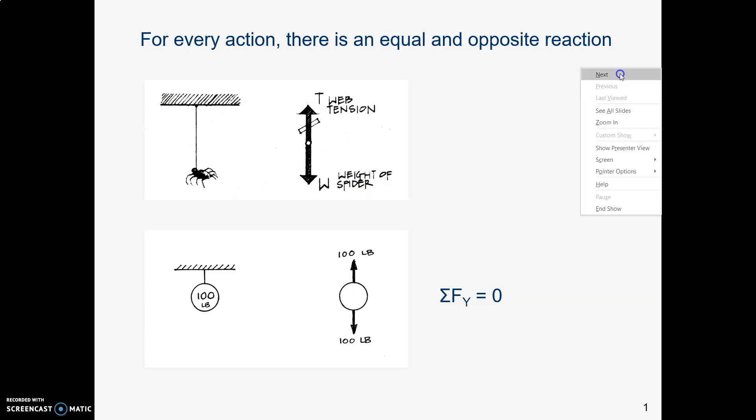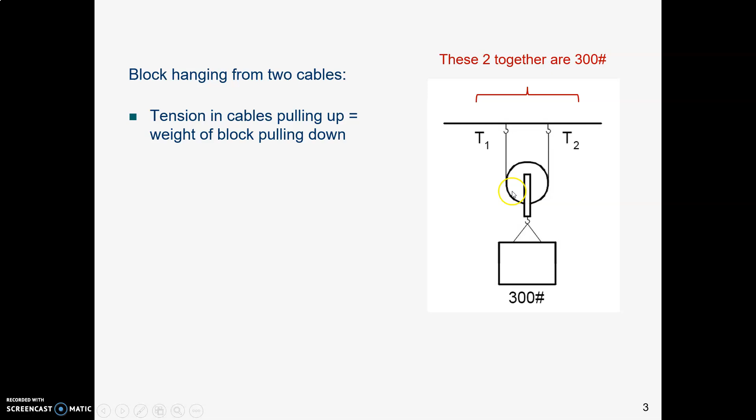Now, how about a block here? This thing weighs 300 pounds, and it's hanging from a pulley, and it's got the cable going around both sides of the pulley and connected to the ceiling. All right, so what do you think is happening in those cables? Think about what you know about this equilibrium equation, that the sum of all forces in the y direction, in this case, the sum of all forces equals 0.

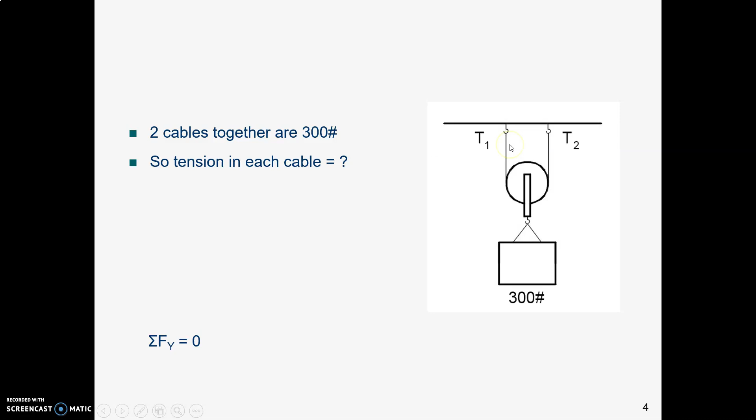And what have you got? You've got 300 pounds going down, so you must have 300 pounds going up. But that 300 pounds going up is divided among those two cables. So how much is in each one of those, T1 or T2? If you thought each one has 150 pounds, you were right.

Now, what if this is you lifting this 300-pound block, and you wisely figure out, it would be easier to lift if you could pull down on that cable. So you do this. Things are starting to look more complicated, but what you might notice is that there are still two cables going around this movable pulley. There's still 300 going down. There must be 300 going up, regardless of what this person is doing with the changing direction thing.

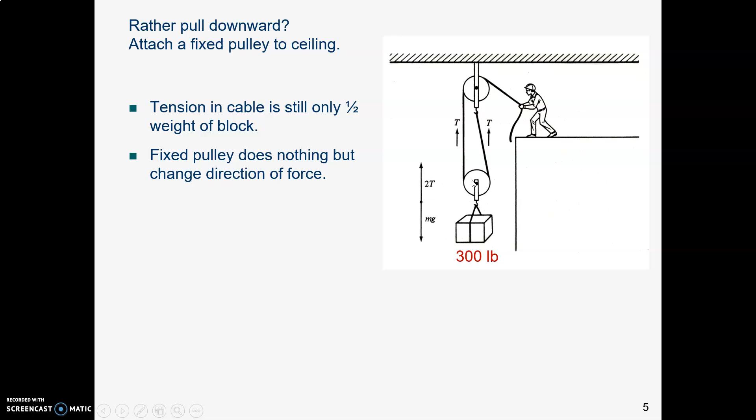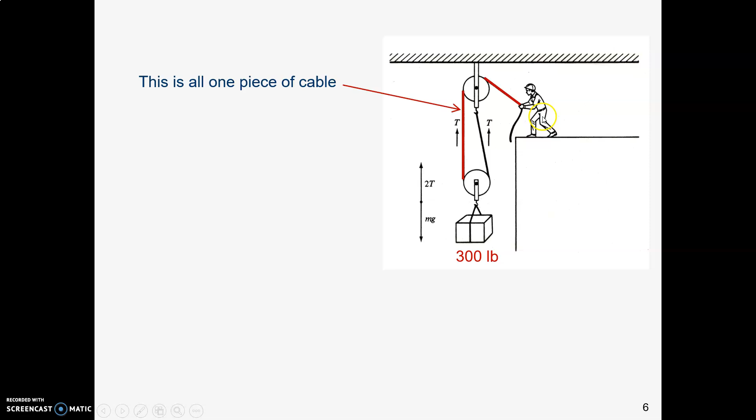That changing direction thing, that pulley, that rope going up over the pulley, that's all one piece of cable. So we've got 300 going down and 150 in each piece of cable going up. And that one 150-pound cable is just going up over this pulley down here, but it's still 150 pounds.

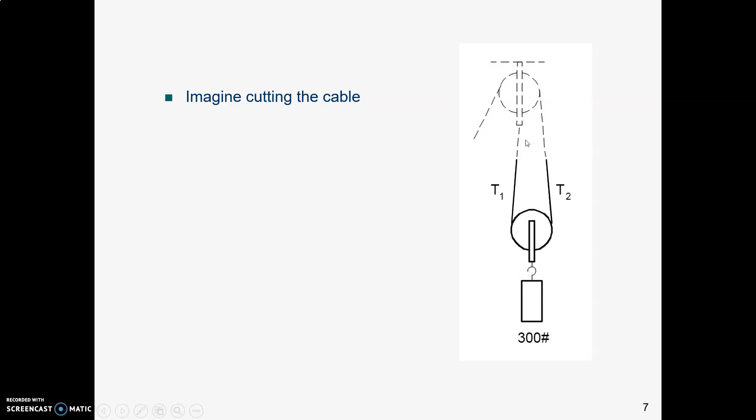It might help to think about this if you imagine having a pulley here. There's our 300-pound weight. And imagine, what if you just cut those two cables right there? So now, if you imagine this top half went away and you're just left with the bottom half, you've got 300 pounds going down and 300 pounds going up, but it's divided among those two sides of the cable. So together, those two pieces of cable pulling up are 300 pounds. How much is in each cable then? 150 pounds on one side and 150 pounds on the other side.

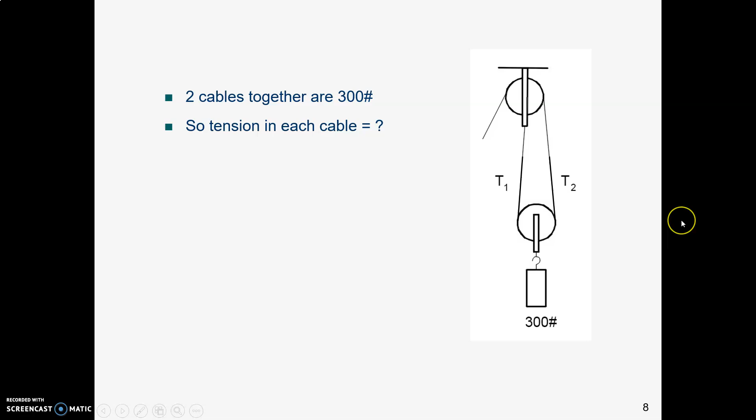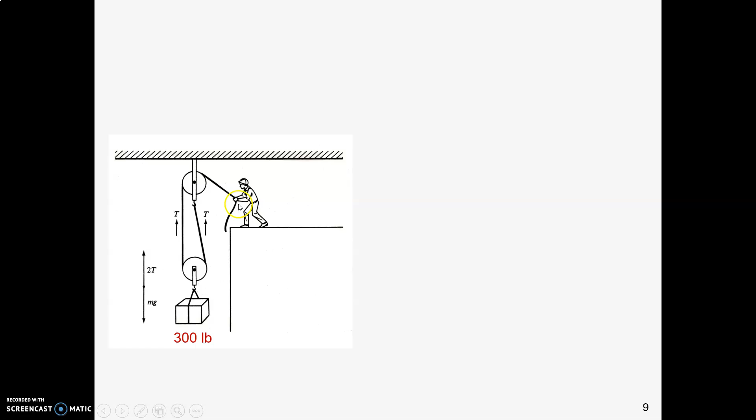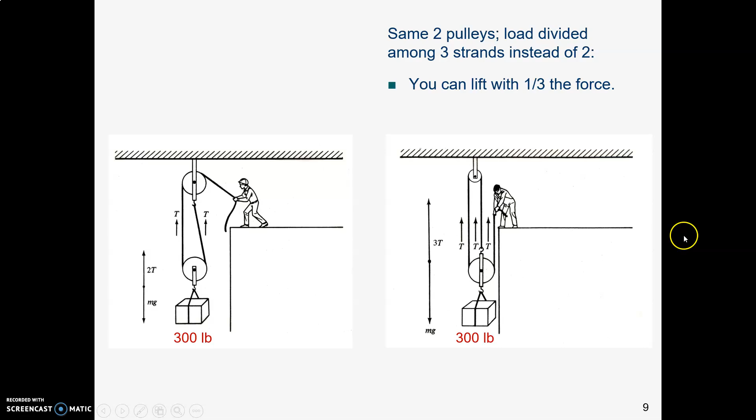So here's this same 300-pound block, and now you've got essentially three pieces of cable attached to that movable pulley that is attached to that block. And you've still got 300 pounds pulling down and 300 pounds pulling up, but now that 300 pounds is divided among 3 pieces of cable. Or if I drew this.

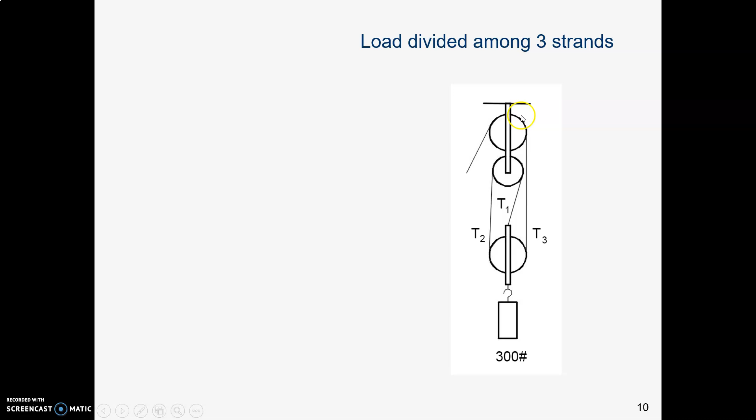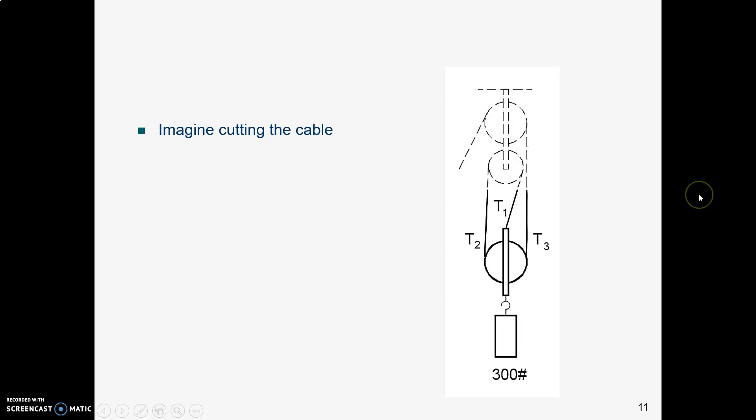So if those 3 pieces of cable together are lifting 300 pounds, how much is in each cable? 300 pounds going down, 300 pounds pulling up, and that 300 pounds is divided in thirds, so each one of those cables is lifting 100 pounds. And in fact, if you wanted to get tricky, you could pull down on this cable that changed direction and went around the top pulley, and you could lift that 300-pound weight by pulling with only 100 pounds of pull. So that's handy.

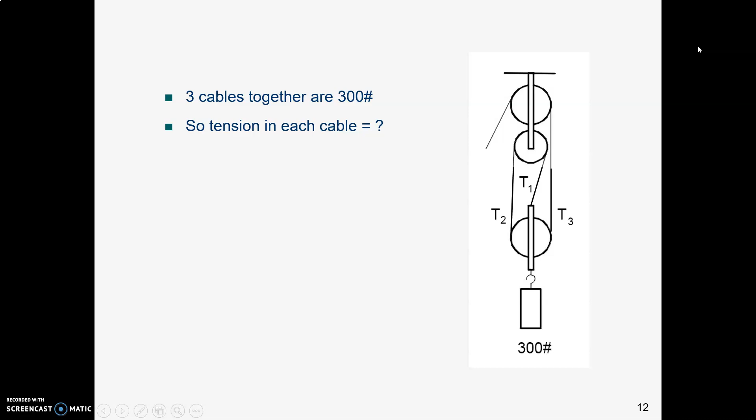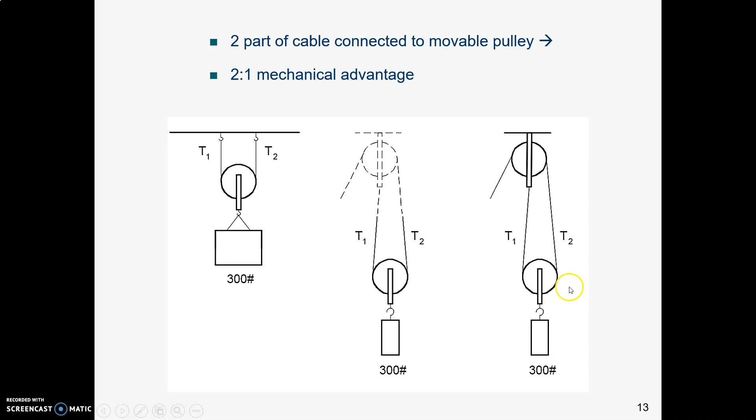And here is the trick to sorting through all this. Let's review where we've been. We looked at a weight hanging from 2 pieces of cable. Here we started hanging from the ceiling. Then we got a little trickier and we had a movable pulley here, but we cut the cable so we could think about it. And now here's our movable pulley with our cable. If you have 2 parts of cable on the pulley that moves, you have a 2-to-1 advantage. In other words, 300 pounds pulling down, 150 pounds in each piece of cable.

Here's our system that had more stuff going on, and it had 3 pieces of cable on the movable pulley, and we imagined cutting that cable and throwing away the top half so we could visualize what's happening. And now, connected to the movable pulley are 3 pieces of cable, and each one is carrying 1/3 of the load. So a 300-pound weight pulling down, 100 pounds on each cable lifting up. And so this outfit here has a 3-to-1 mechanical advantage.

And you notice how I've kept saying movable pulley, movable pulley? I want to emphasize that when you're facing a deal like this and you're saying, like I do, oh my gosh, I don't know what I'm looking at, help me, you just have to focus in on which pulley is movable. These other 2 pulleys up here are very nice and they're doing something or other, but they're not lifting anything. Those guys are not moving. The only one who's moving is this one that's attached to our 300-pound weight. And so you can just focus in on that one.

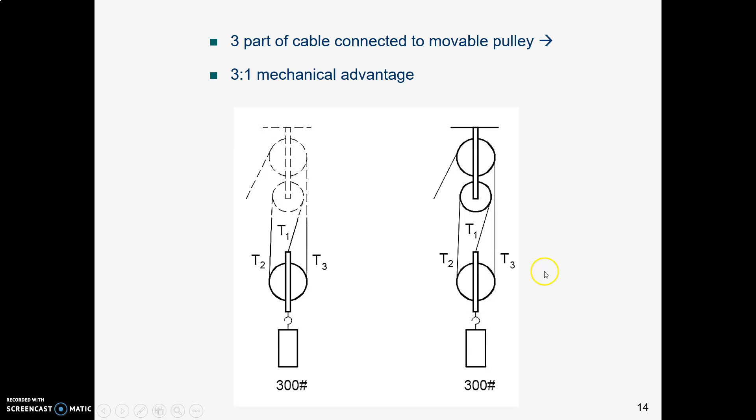How many parts of cable are connected to the movable pulley? That's what your mechanical advantage is. And so in this example here, 3 parts of cable, you've got a 3-to-1 mechanical advantage. In other words, each cable is carrying 1/3 of the load. So there you go, there's the trick.